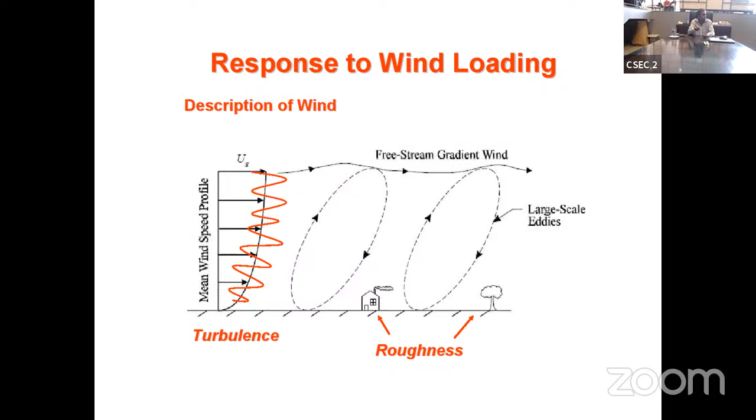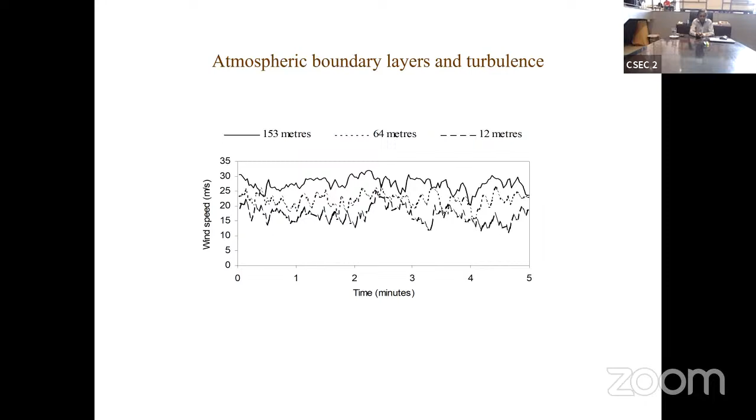Just an example. So the roughness effects become less when it goes to the top of the buildings, at different heights above ground. I'll come back to all that. So again, I'll just skip some of the basics. But these are the features. You will realize already the increase of speed with height, that the average parabolic profile changes and increases with height. And the turbulence, I will explain a bit later on, changes at each height level.

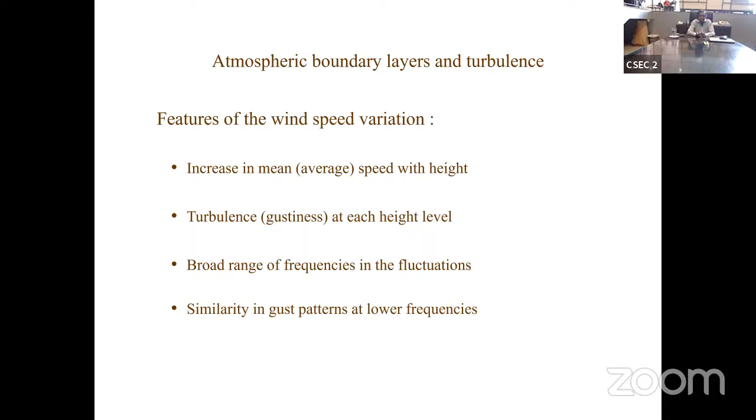Also, it's probably not that important for high-rise design, but the frequencies of the fluctuations of the wind speed change as well. And also the gust patterns. I'll come back to gusts later on.

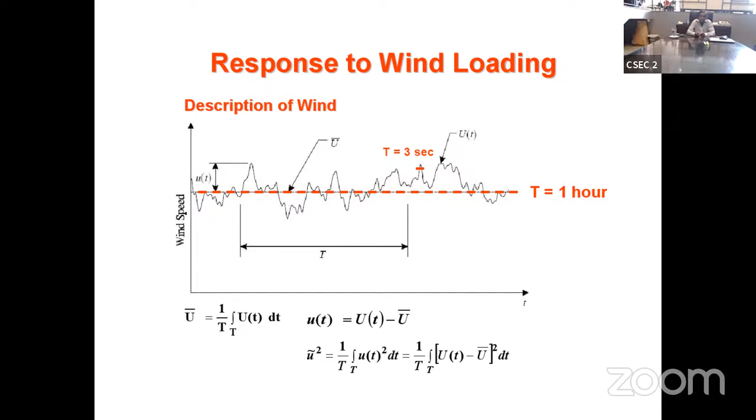I always proudly say the Australian Wind Code, not because I'm on the committee, is considered the best in the world. That's not because of the present committee, but the pioneering work done by Professor Bill Melbourne, Dr. John Holmes, and people like that. The Australian Wind Code has some of this work which is not in other codes. That's why it's used not only in Australia but other parts of the world as well. You can also look at the Eurocodes and ASCE 7, the American code. But the Australian code has been very popular.

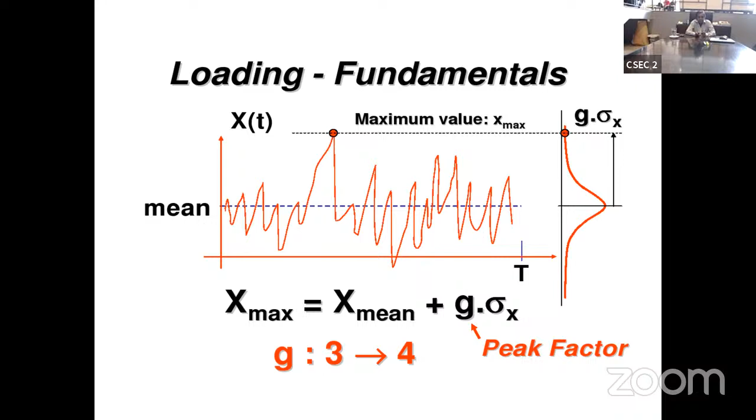We need maximum values for our designs, structural design especially. So we need that, and that's why we get the mean plus the peak factor and a standard deviation. So then actually I'm just in the Australian context, but it can be applied to different places. If you think of Colombo, wind speeds are really closely related to Melbourne wind speeds.

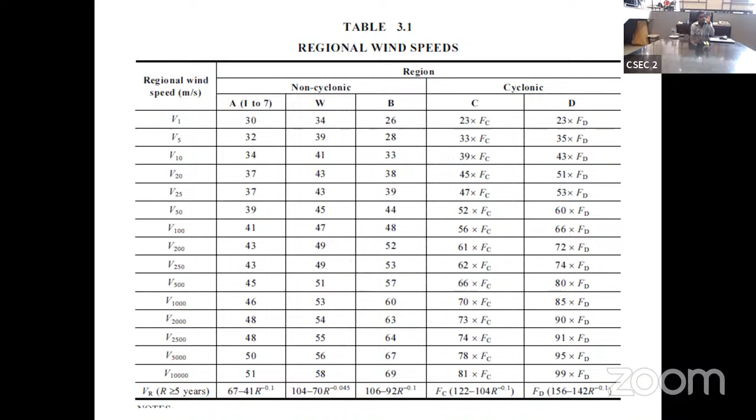Anyway, these are scientific definitions, which I will not explain too much today. So there's a scientific statistical definition as well for return periods. So these are return periods, but that crude definition I said is good enough. So we sometimes say 1 year return period, 5-year return period, 100-year return period. It'll happen now and then it'll happen only within 100 years. So that's a 100-year return period. That sort of crude definition is good enough for now.

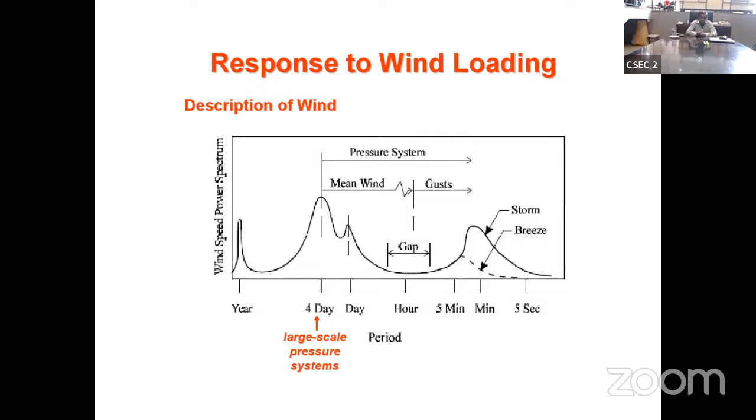So this is the response to wind loading, but don't worry about all the detail. We use in wind engineering what's called the wind speed spectrum, with time on the x-axis. You can see with the normal storms and all that, it's really more towards that 3-second gust speed side. That's all I want to say. And you will see the mean wind speed plus the gusts, the turbulent gusts, are there. So you add them up. But these are spectrums which you don't need to worry too much about.

If you like, you can read John Holmes' book, Wind Loading of Structures. You can even Google Wind Loading of Structures, John Holmes. He is a very close friend of mine, leading our wind code committee. His book is the most popular book, Wind Loading of Structures by John Holmes. And some of that I learned from him as well. My mentors in wind engineering are John Holmes and Professor Bill Melbourne. So I was very fortunate to learn wind engineering under both of them.

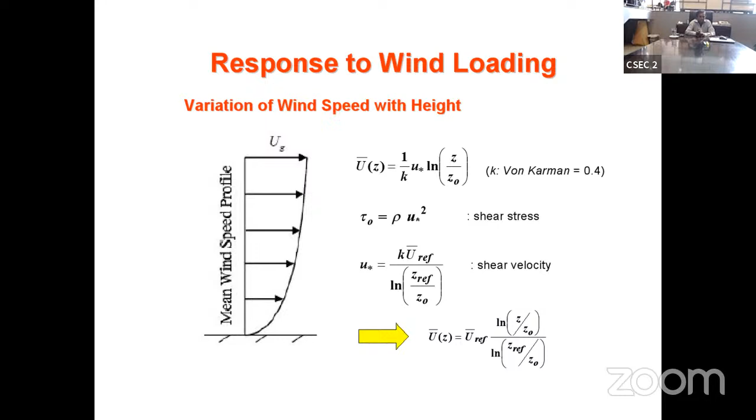So with the wind speed with height, there are standard equations we use to define the wind profile. It's close to a parabolic profile. It's zero at the ground, as I said, and then increases in a parabolic profile until the gradient height. After that, it roughly remains constant. I'll give some values. So this is another, the power law profile, which is the one we normally put in our codes. It's the next level of the parabolic profile.

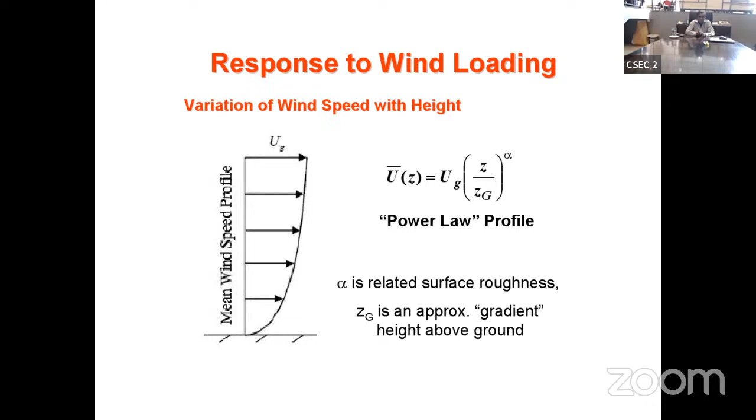So then what happens? Then we define what are called terrain categories, depending on the roughness. On the left-hand side, you can see the sea or coastal lines, airports, all that, with hardly any roughness. So very low roughness, so the gradient height is lower because the surface roughness is very low. The wind speed settles down very quickly, so the gradient height is lower.

The other side is terrain category 4, which is the city centers. In this case, in the city centers, the roughness is very large and the gradient height is very high, because it takes large heights to really reach the gradient height of 500.

So it depends on where the building is. Usually high rises are in the city center, so it's a bit more towards the right-hand side. At the same time, a lot of engineers make this mistake. That is, for high rise, sometimes we take terrain category 4, which is city center. But we have to take between about 2 to 3.

In this webinar I will not ask live questions, but recently I asked in an engineers forum and no one could answer this. But it's a very simple explanation. If I'm designing a tall building, I would look at it depending on the height, between 2 to 3. It can be even 2. The reason is that particular building could be the tallest building around that area.

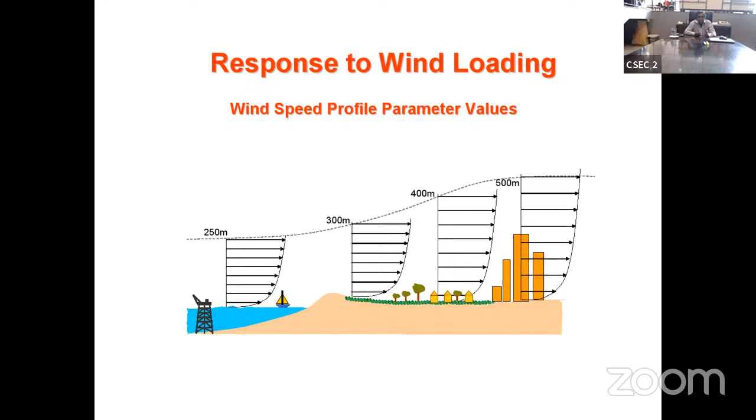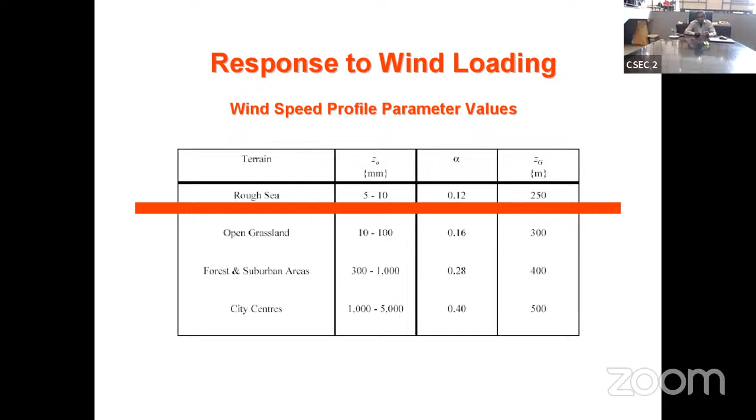Now, once we select the terrain category, the first one is a rough sea, as I said, or the open air. Again, you can see the gradient height. Sorry, the last column is the gradient height. The ZG changes, and again, as I said, 500 for the city centers. It depends on the code. Some codes have different values, but roughly you should know why the gradient height changes, because it's the roughness in there.

I'll skip this one. So there's a turbulence intensity graph in our Australian code. Height is there, and you can see the turbulence intensity, because as I said, the surface roughness changes, and the turbulence values become lower. But in the Australian code, one of the changes, I was part of that team, we made this change.

We introduced another terrain category in between called 2.5. Because people used to interpolate between 2 and 3, we said, why not? We put 2.5, and we have an extra column as well. For many cases, we can use even 2.5. This is a chart given in the code, turbulence intensity. The height versus the turbulence intensity depends on the terrain category I mentioned before. City centers are on the 4 side, and the open areas, like airports, rough seas, oceans, are terrain category 1. Others are in between.

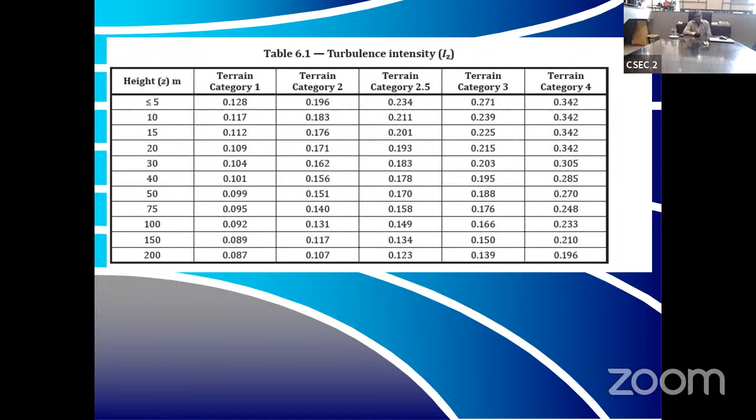Now, coming back to the static versus dynamic. Static is on the left-hand side. The static is where you are used to this equation: force is equal to stiffness times the displacement. That's a basic equation we all learn for statics. You can draw your parabolic wind profile, find the wind forces, and then apply them. So force is equal to stiffness times the displacement.

However, this is important: the wind, especially on high-rise structures, is dynamic. You can't just say static. Dynamic means you have to introduce two new terms, the mass times acceleration, and also damping, because dynamic means the wind speed changes. The mass times acceleration is called the inertial term. The damping times velocity, the next term, is called the damping term. And the third term is the same as statics, stiffness times the displacement. Computer programs calculate all this. However, we need to know the basics.

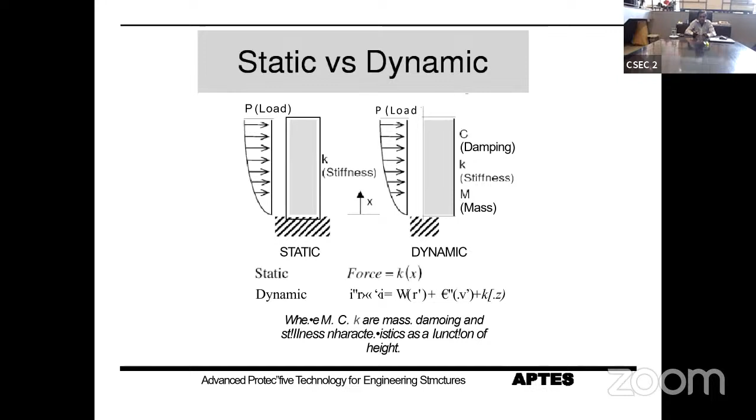Eureka Tower, again, one of the projects that I got involved in, was Australia's tallest; now it's overtaken by another building next door by a few meters, but it's a unique building. At the next slide, I'll show why it's unique. I really helped them with the wind design and also the high strength concrete elements; all that work of mine went into this building.

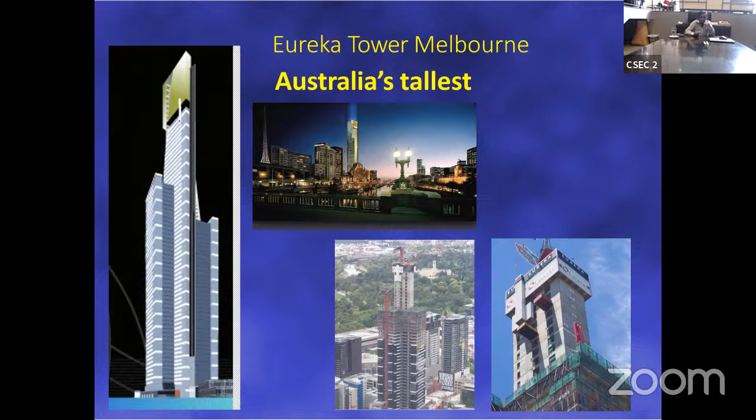So again, what we do in structural systems today, as I said, that's the overview of the lecture or webinar. Structures with outriggers. Outriggers are one of the best inventions we had. Why we can have all these very tall buildings is due to two things. One is high strength concrete, and some of my rules for high strength concrete went into the Burj Khalifa type of project.

So high strength concrete really, because of the strength, we are now going up to about 150 megapascal for high-rise buildings. A few years back, I was asked to look at a pre-feasibility study for a 2-kilometer building and comment on the material. So I was suggesting 200 MPa for that. We know how to make that concrete. So that's the high strength concrete.

The other one is outriggers. This is how the outriggers work. You have a core element. About 95% of the wind is resisted by this core element. This is the lift well, where the lifts are. So we have a very stiff lift well or core, normally concrete. And this core element usually has high strength concrete at the bottom, and it can be lower at the top.

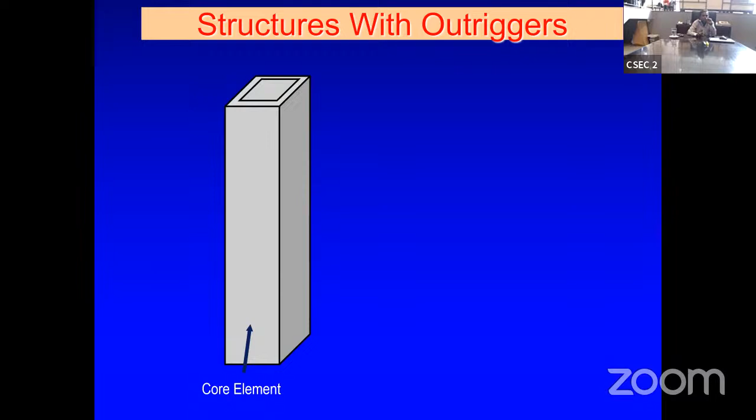So a tall building can be considered to be a cantilever, right? With the loads coming down, you will know the maximum moment is at the bottom, zero at the top. Shear forces are also maximum at the bottom and zero at the top. So the base bending moment is the highest and the base shear is the highest. Those two are the very key factors we need.

Moving on, what we have done now is to take a column outside and join that with what's called an outrigger. I have separate lectures for this, but today just to show something: rather than one person working, if two people work together, it works better, because you share, so the core moment is taken out a bit. Very simply, push and pull puts some compression on the outrigger column, and from that you have additional moment resistance from that column taking compression and relieving tension in the core element. I'll leave that to another day.

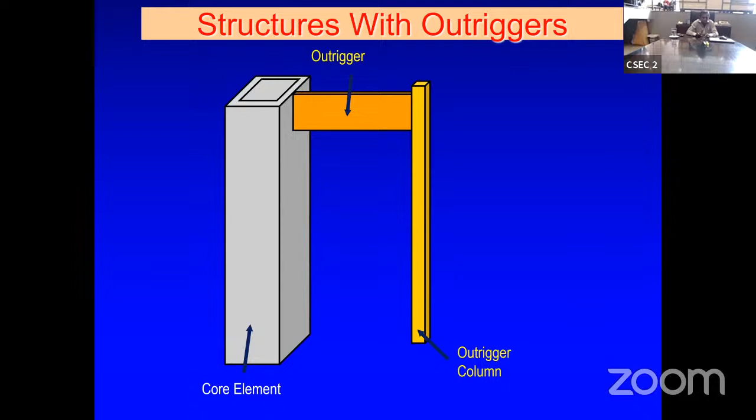You can read how it works in some of my lectures on the web, but I will not explain today. The outrigger is joining that; I'll show one example later. That's really key for us to design some of the tallest buildings. Every tallest building in the world has these outriggers, except for some special plans, which I'll mention later on. Then we put what's called a belt truss for all the columns to work together to help the outrigger column. These are very common. That's why we can design very tall buildings.

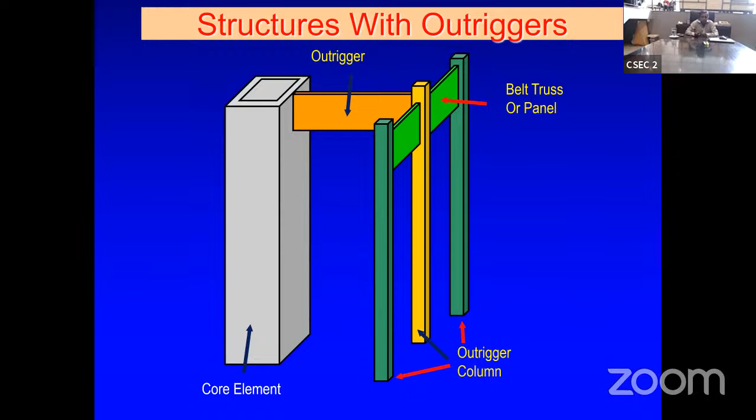And what outriggers do is act like a hat. You can see it releases a bit of the core moment, takes out a bit of core moment, so the core sizes can be reduced.

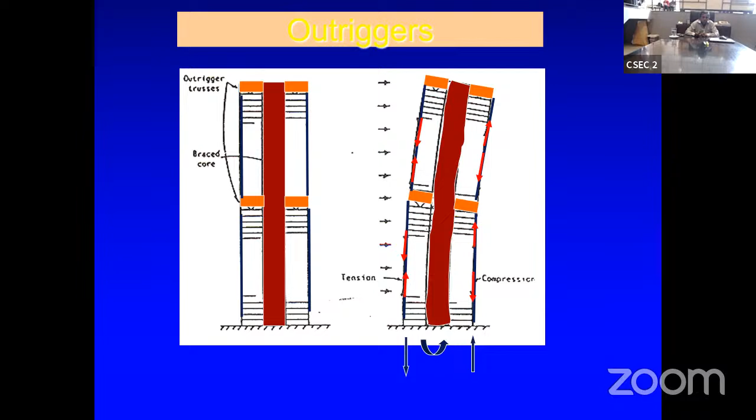This is something that I'm again proud to be part of, the initial stages of Eureka Tower. The developer of this building, it's a success story, probably the only one, and a lot of people appreciate this. The developer was the architect. The engineers were the company that I used to work for at the time, Connell Wagner. I was at uni, but I was still working with them on this project.

So what we did was we said one side is a bit weak, the north-south direction. We couldn't satisfy the requirements, so we had to put outriggers. Now this is why it's unique. Outriggers normally are at about 2 or 3 levels. For this one, we put outriggers at each level because they are the separation of the apartments. Because the architect was the developer, we could put outriggers at each level. That really improved the efficiency of the building.

Because if you put a full height outrigger, normally you need about a full storey height, and you can't put it anywhere else. You need to put it in plant rooms or machine rooms. But in this case, it was smartly put between the apartments, so we could put outriggers at each level. Anyway, I'll leave it like that. If there are any questions, I'm happy to answer.

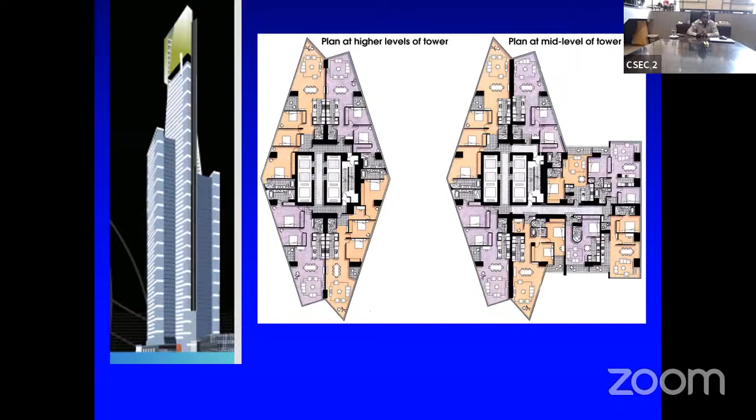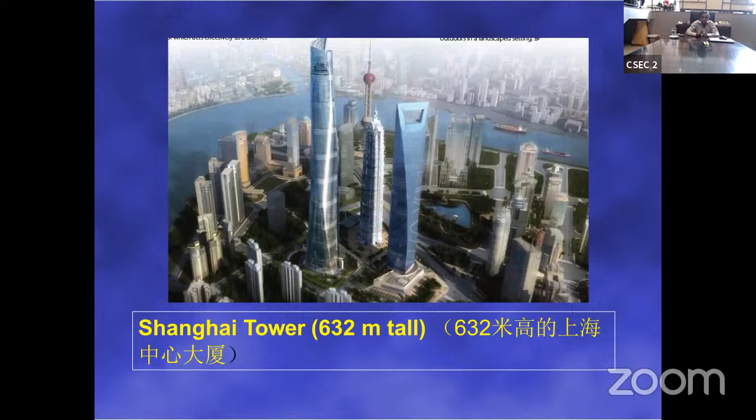Shanghai Tower used to be the second tallest, but when the Merdeka is open, this will be the third tallest, 632 meters tall. I'll have some slides on the Merdeka building, which is 679 meters. In this one, I had some involvement through the Victorian government because there was an agreement with them to help in the high-strength concrete side. I got involved in the concrete side, not on the wind side, through the university work. I know them well also.

So what they did was a really very difficult task. They changed the wind pattern, reduced the wind loads. Wind loads are the key. Reducing the wind loads means they rotated it at every storey, to minimize the load from the wind, rotating at every level by a small degree. Doing this, we can reduce the turbulence. I'll come to vortex shedding later on, but I'll go through a bit quicker. Vortex shedding, that's turbulence. Reducing turbulence is a key.

So we call it confusing the wind. We don't allow the wind to really settle down. In this case, by rotating every floor, we really upset the wind. If you upset the wind, in fact, it reduces the wind effects. Normally, it's the other way around. If you try to upset people, they become more active and more turbulent, right? It's a little bit the other way around here.

I have these stories I'll tell you another day, but not today. Some of these turbulent stories.

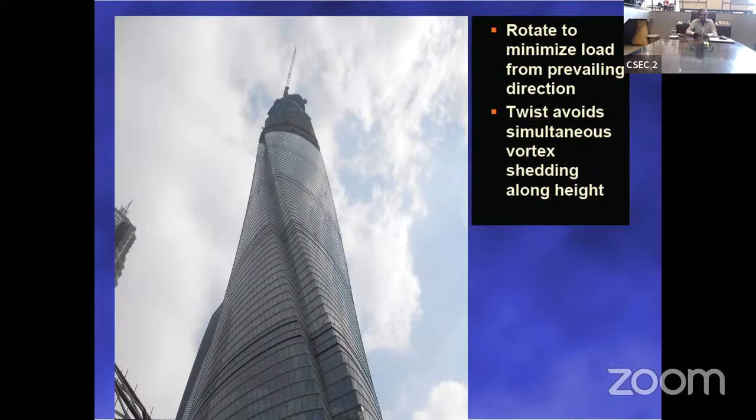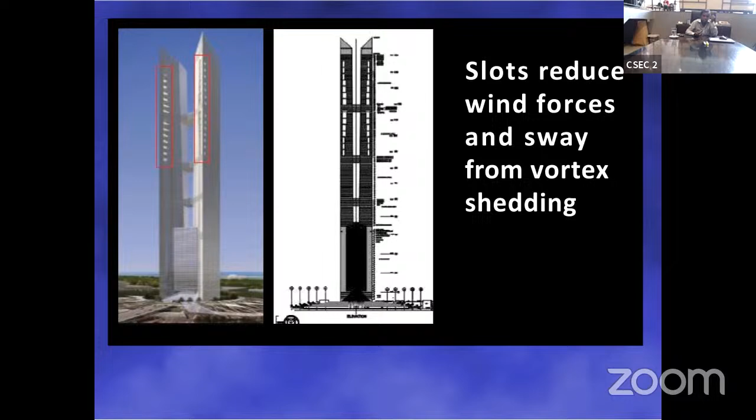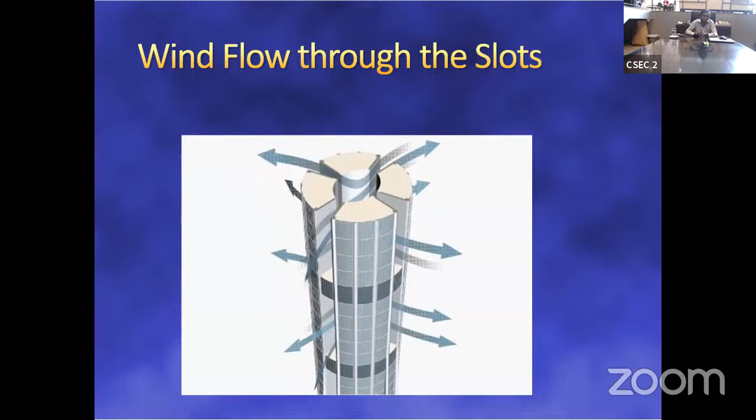The 1 kilometer tower, I was again proud to be involved in the initial stages. We did lots of work at Melbourne University trying to shape it up, having slots to reduce the wind flow through the slots. That work we suggested by doing computational fluid dynamics work.

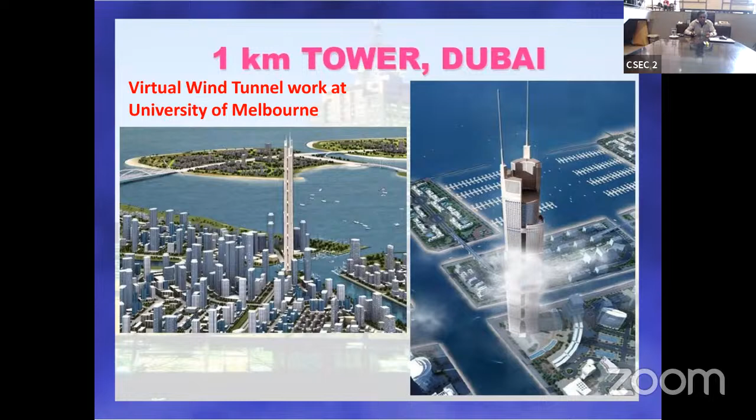These foundations, they put $150 million in Dubai, but then the world financial crisis came, 2008 if I remember correctly, and everything stopped. It's worse than the Sri Lankan financial crisis, which was confined to Sri Lanka. But this was at world level. So Dubai was affected a lot. They stopped the construction of this. The $150 million is under the sand still. You never know, one day it will come. So that's okay. We could achieve something as a team.

Taipei Financial Center: I told you, by putting a very high mass on top, you can reduce the dynamics. That's what is done. You can go there and see this big mass at the observation deck. So maybe you can go on your next holiday to see the Taipei Financial Center and see the very large mass on top, which reduces the dynamics.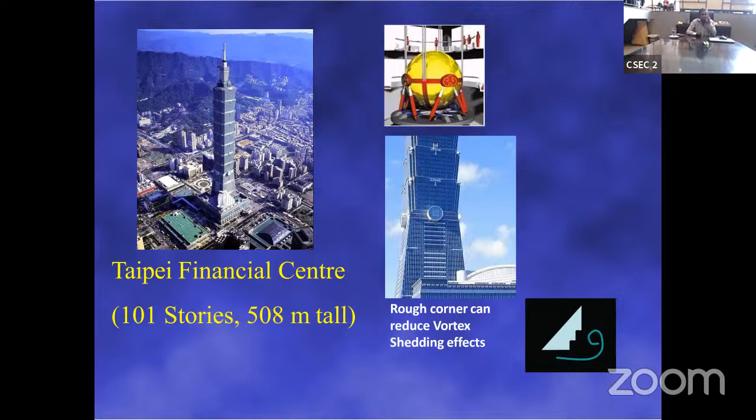Also, they had rough corners. As I said, confusing the wind, having rough corners, you also really reduce the turbulence. It's all about reducing the turbulence in wind, simply put. So this was about 3 weeks back, those who have seen this photo. Merdeka is going to be the tallest. I was very proud to be involved in certain work. I was there in the workshops from the beginning because the architect was from Melbourne as well.

Second tallest, 118. It will be open only next year. If you go there, you can only see it from outside. I had a chance to go to the top. So this is the building; really no need to read from there. It's a building with different heights, and different consultants got involved.

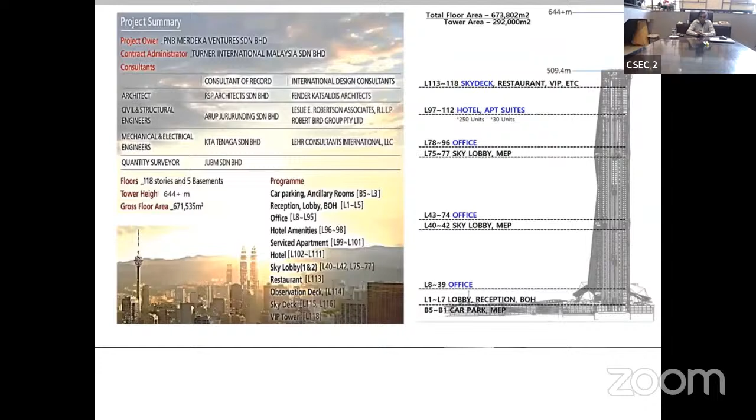One of the things I really gained was sitting next to Les Robertson, who I consider one of the best in the world, who designed the World Trade Center. He was there at the beginning and told me stories about the World Trade Center and everything, but I will not have time to say today. He passed away about 3-4 years back, lived till about his 90s. His wife's team will be presenting this work in the next AWH conference. She's also a structural engineer, well known to us.

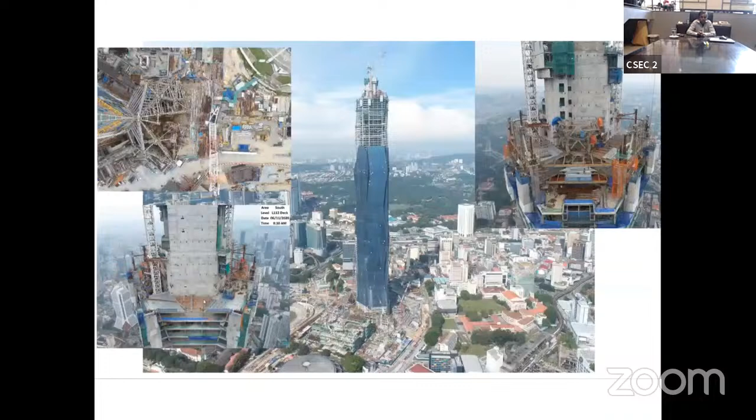So this is during construction, the Merdeka Tower. This is quite important. Those who are listening on the web, seriously, if you're copying any of these slides, you need to get permission to present. I was part of the team, so I'm allowed to present. But anyone presenting these slides has to get permission from the PNB developing team, because there could be some sensitive information. Happy to present today; this is also from the ICE Malaysia Institute of Civil Engineers presentation.

They presented this material. Now this is where you will see the structure. This is the concept stage. All these systems were considered. In the initial workshops I was also present when we talked about different concepts. We had Peter Irwin from RWDI Consultants, the leading wind engineering consultant. They have a big wind tunnel in Canada. They did Burj Khalifa, Shanghai Tower, and Merdeka 118 as well, so they are the leaders. Peter Irwin is well known to me as well, so he was presenting some of those.

But the structural group, especially Les Robertson and Robert Bird Group from Australia, were doing the initial structures. Arup Malaysia was the local consultant, which later joined. The final one is this first one. You can see different concepts and different shapes of the building were considered. That's why it's called structural wind engineering, the word I've given: we need to know both wind engineering and structural engineering to design these. I have to appreciate CSEC and Mr. Shoma's work as well on the structural wind engineering side.

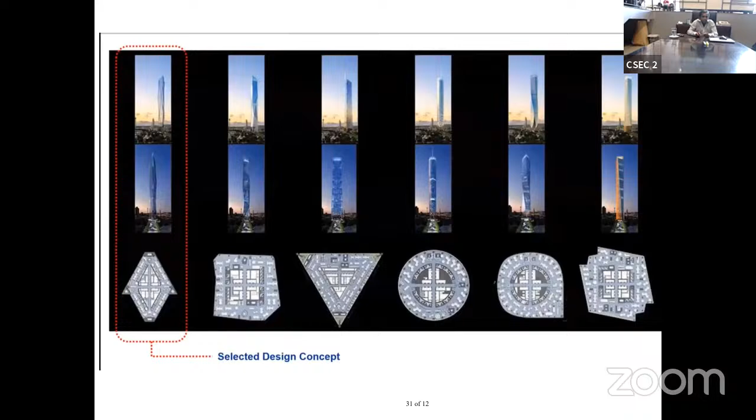So this is the final concept and shape. This is called aerodynamic shaping. That's key in tall building design, and you can earn a lot of money if you really master it. We get paid very little, but some of these wind engineering consultants get paid a lot. Aerodynamic shaping means you're reducing the wind effects. I'll introduce that later on.

In tall buildings, the difference from normal buildings is the drag force, and the other one is crosswind. The perpendicular movement is crosswind. So you have movement parallel to the wind as well as perpendicular to the wind. This crosswind action could be higher than even the along-wind action. Today I don't have time to teach all that, but look at the along-wind and crosswind actions. In normal buildings you don't worry about crosswind, but in tall buildings crosswind is key, so you need to reduce it.

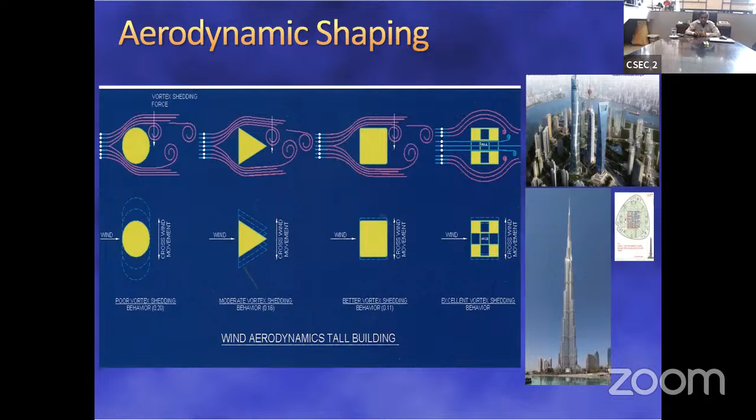Next time, when I do a longer course, maybe in December, I will talk a bit more about drag forces, crosswind, and how to reduce them. I had students looking at that. So Merdeka 118, again, please don't copy this, anyone in the webinar. This is the office floor plan here.

In this case, these are mega columns. There are many mega columns being put in there, and the outrigger system. Mega columns and the outrigger systems are joining. That's the structure system. It was very weak in the east-west direction. I know that in some of the workshops this was discussed in detail.

The east-west direction was weak. So Les Robertson himself came up with the outriggers joining the mega columns. As I showed you before, the core, the middle structure, joining the columns outside through outriggers to make mega columns outside really gave the stability to this Merdeka tower.

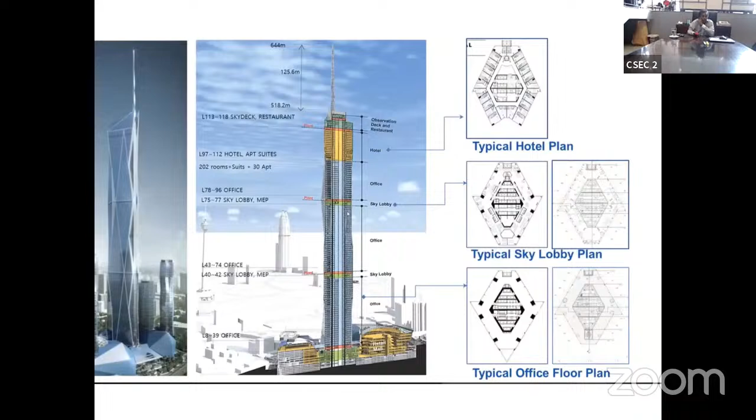Don't worry too much about that. These are the outriggers, both directions. The east-west direction was the most critical. East-west is here. In the east-west direction, you can see more mega columns being connected through the outrigger systems. And the north-south direction was all right.

After the analysis was done, east-west had 3 outrigger levels, if I remember correctly, here at the middle level, bottom, and the top. But in the north-south direction, the initial designs had 3 outriggers, but with Mr. Les Robertson's involvement, one of the outriggers at the middle level was taken out. Huge cost saving by doing that. This is the kind of optimization you can use. So optimization is key.

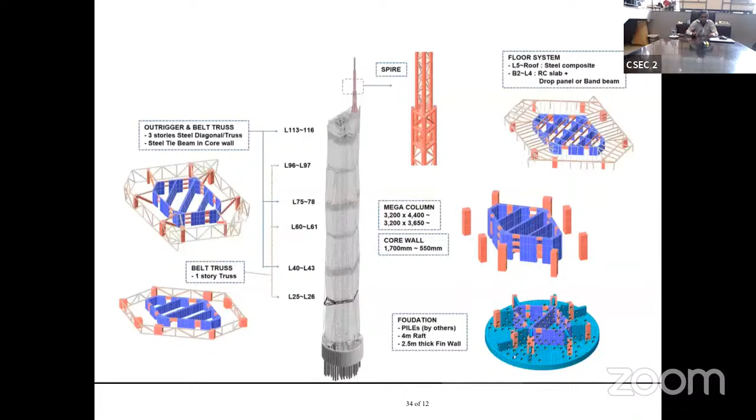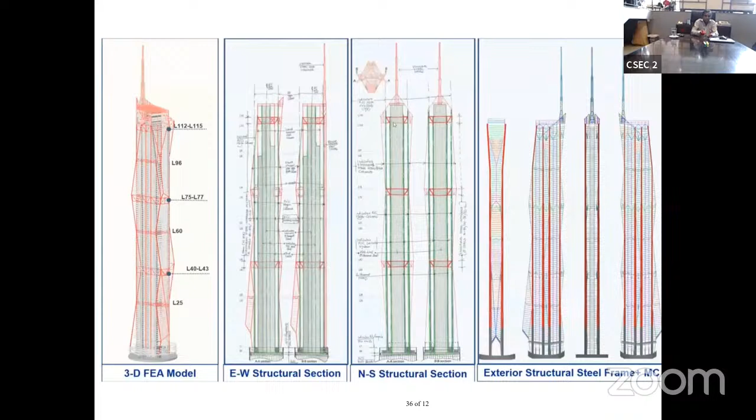Now this is the first time I'm presenting some of the Merdeka information. So that's where the building is, skip that detail. See the east-west structural section, you can see the outrigger locations. The north-south middle outriggers were taken off in the final.

Getting to the Jeddah Tower. Jeddah Tower is going to be the world's tallest, 1 kilometer tall, and CSEC was invited by one of the Chinese builders to join their tender. Not sure when it's going to start again. It stopped and started; 2012, I think, it started. There were other issues, political issues, financial issues, and COVID came, so this got stuck. I heard it's going to restart, but it hasn't.

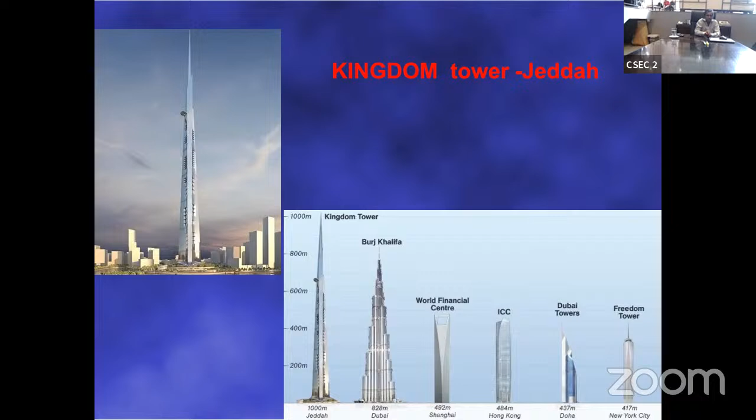It's going to be 1 kilometer tall, higher than the Burj Khalifa. See where the Burj Khalifa is. The Burj Khalifa is 828 meters tall, if I remember. This is going to be about 1 kilometer. The structure system is not an outrigger system, it's mega walls. I'll show a plan later. A mega wall system, similar to the Burj Khalifa. SOM designed the Burj Khalifa, and they suggested this similar system. In this case, 3 mega walls are shown there.

See, it confuses the wind. If you have a symmetrical building, you get a lot of turbulence effects, and wind loads can be very high. These are the things I really want to mention in this webinar today. You need to do these things in tall buildings. For a 2-story building, no point spending a lot of time, but wind is still important. When it gets to high rise, wind governs everything. So we really need to do these things.

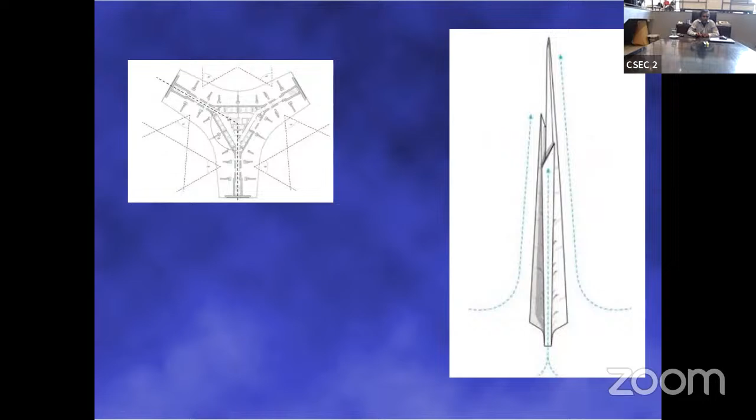In this case, it confuses the wind, as I said. See, it's unsymmetrical, different directions, so the wind loads were reduced. That's optimization we normally do, also called aerodynamic shaping. These are mega walls. In this initial construction, see the mega walls starting to be constructed. This was 2013, if I remember correctly.

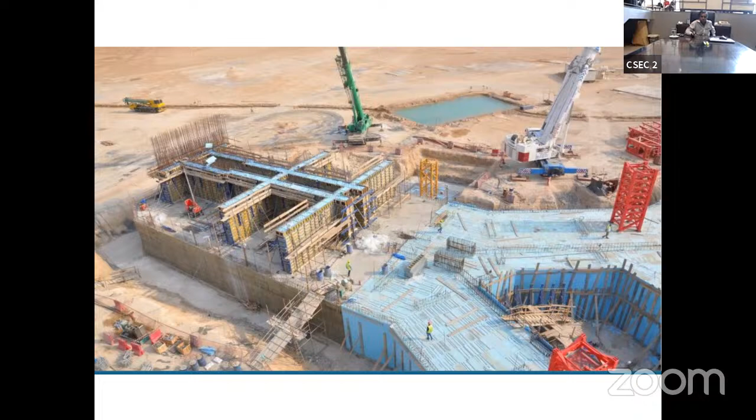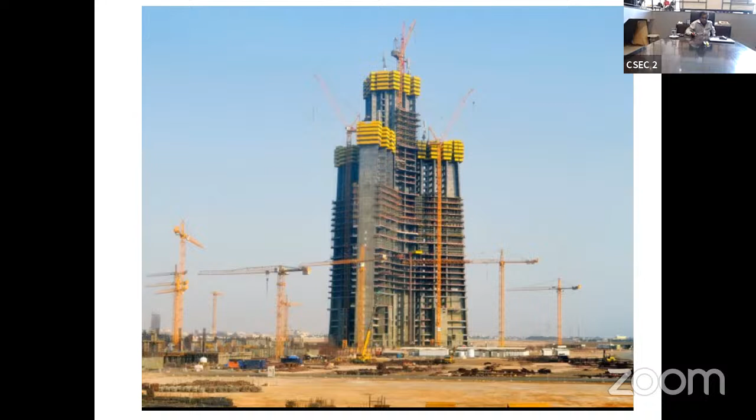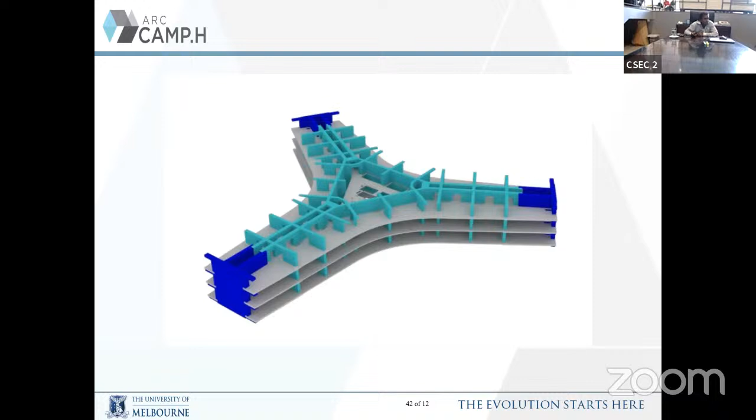It's gone up to about this level, I think it's level 43. It's very slow. As I said, mega walls, a triangular area at the middle, and then mega walls. So sort of outriggers, but joining the mega columns there. So that's the system in Burj Khalifa and Jeddah Tower.

Types of wind design, the 3 types of wind design. I'll run through quickly. So the types of wind design: the environmental wind studies, and the wind loads for the structure. That's very important, calculating the wind loads on the structure. I'll start from the top.

Environmental. Having a tall building means you are changing the environment, everything. It's like building a city. That's why environmental wind studies are done, looking at the environment. Sometimes we do air pollution studies there too. These are all done through wind tunnels. I'll come back to that.

Second one, cladding is the external face. So the cladding, the external face, is the wind loads for the facade. The outside cladding is like the external face.

People identify us through looking from outside. Similarly, for buildings the outside cladding is quite important. The cladding is the first to feel the wind load, so we need to look at the wind cladding loads as well. Codes are there, but they give crude values; that's why we need wind tunnel studies, which I'll come to.

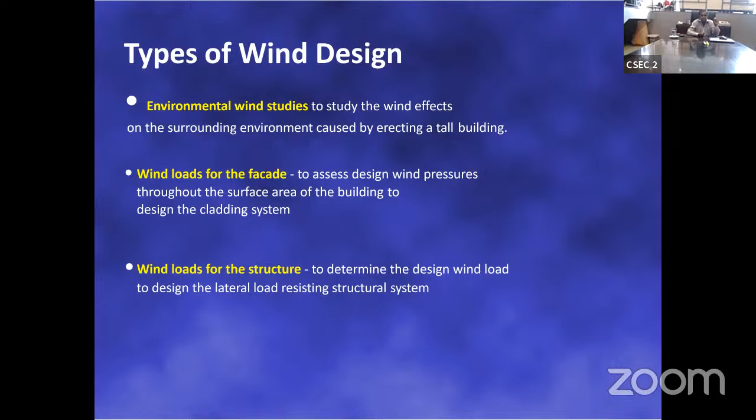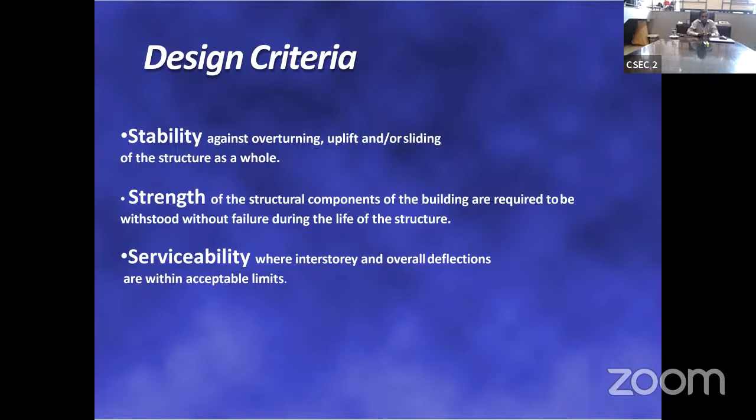So these are the three types of wind tunnel studies we do. Design criteria are the same as normal. Look at the stability, which I call the 3 S's: stability, strength, and serviceability. I will not go into the design side too much today; I will not have time. It's more of the wind loading side. There's an SDI document, a very good document on tall buildings, with a bit more detail, and some of my papers have some more detail on this.

But the drift is very important. The total deflection is also important. To find the total deflection, you see height divided by the displacement. There are no fixed rules in the world. There are no proper codes. I think one of the first is that SDI document on tall buildings, which anyone around the world can ask SDI for. That book has some guidelines, but these are not fixed guidelines. So it can be 500 to 1,000, the height divided by the top deflection.

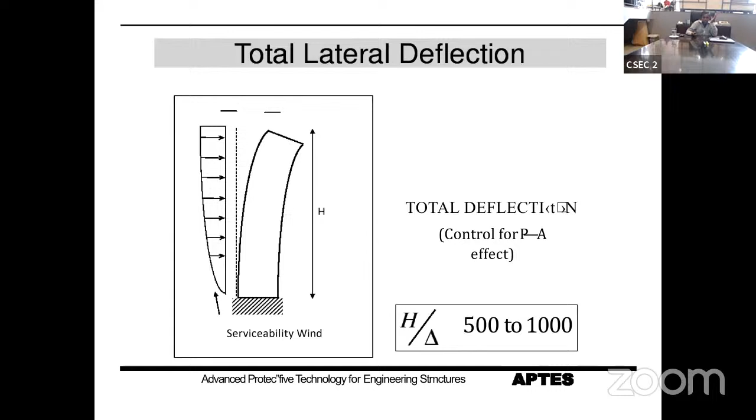But more important is what's called the wind drift. Drift means the displacement difference between two stories, the story height divided by the displacement between the stories. That's, say, 200 to 400. We say generally 5 to 15, depending on the project and the design. So let's say 10 millimeters or so. That's the reason wind drift is another very important governing criterion for tall buildings. The other one, which I'll introduce later on, is the perception of motion.

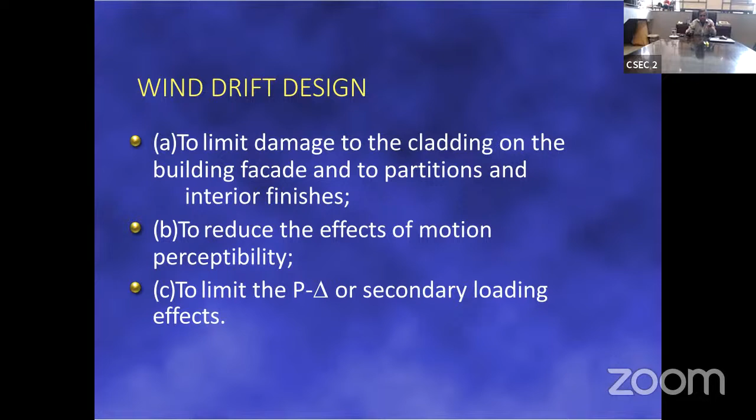Sorry to go back, but the reason wind drift design is very important is the cladding. When you fix the cladding, it feels the difference in deflection between the stories, not the total deflection of the tower. So the wind drift is very important. Also the acceleration, which I'll come to. Focus on number A; don't worry about B and C now. Especially for the cladding and the interior partitions, wind drift has to be limited, so you need to come up with that number. That's the interstory deflection.

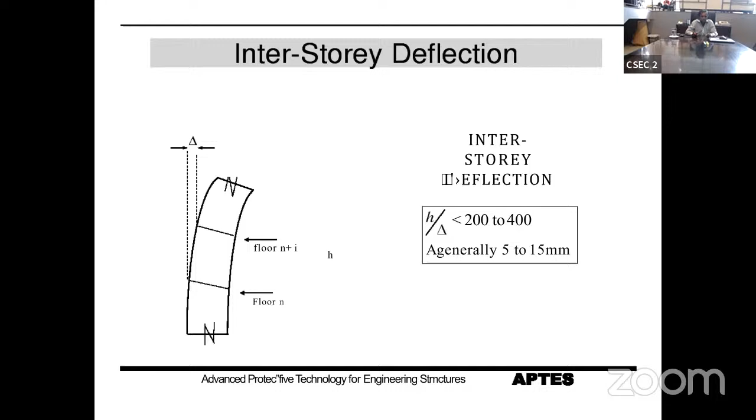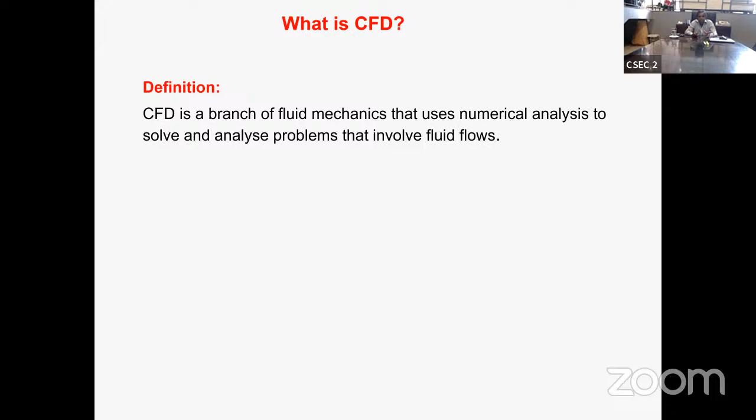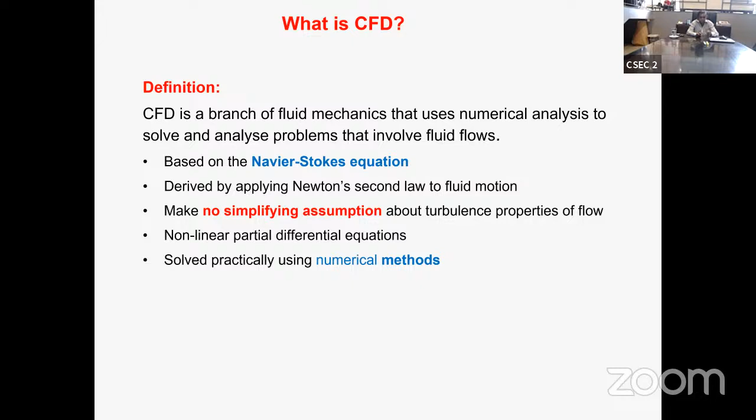I'm running through these very quickly. Computational fluid dynamics, CFD, has changed the world for high-rise designs. The CFD is based on theory; unless you want to go deeper, don't worry about that. But it's the famous Navier-Stokes equations, based on Newton's laws. Don't worry about the numerical methods. CFD means solving the Navier-Stokes equations using numerical methods.

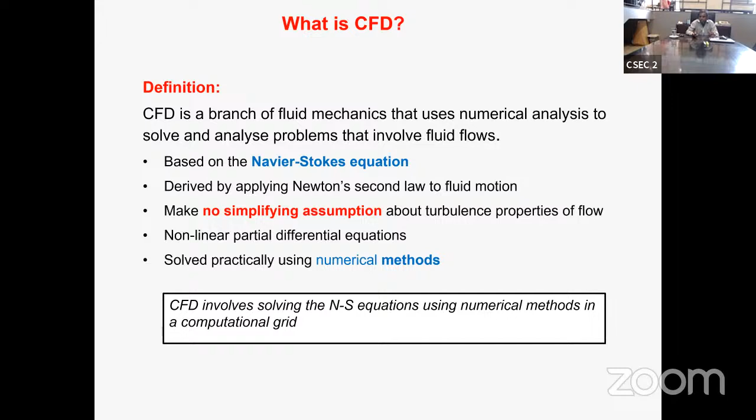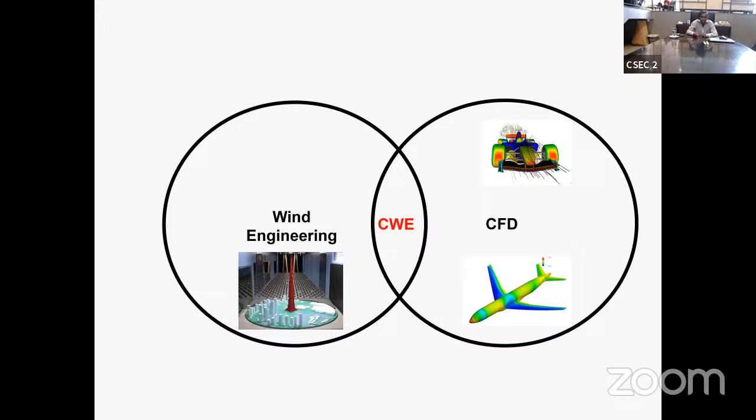Computational fluid dynamics has changed the world in terms of high-rise wind design, and it's still evolving. Wind engineering is on the left-hand side, and computational fluid dynamics applies to any fluid. We have been designing aircraft with computational fluid dynamics for a long time. Computational wind engineering is a combination of wind engineering and computational fluid dynamics. That's basically what we are using for high-rise.

Then we need to look at what's called fluid structure interaction. We have a computational fluid dynamics model, we put the loads, and then we look at the deformation. Wind is a fluid; the wind and liquids, the water and all that, are fluids. The fluid applies a load, the structure deforms, and because the structure deforms, the loading gets adjusted. This is called fluid structure interaction, FSI. Very important to model. We don't need to model it for every building, but FSI is quite important.

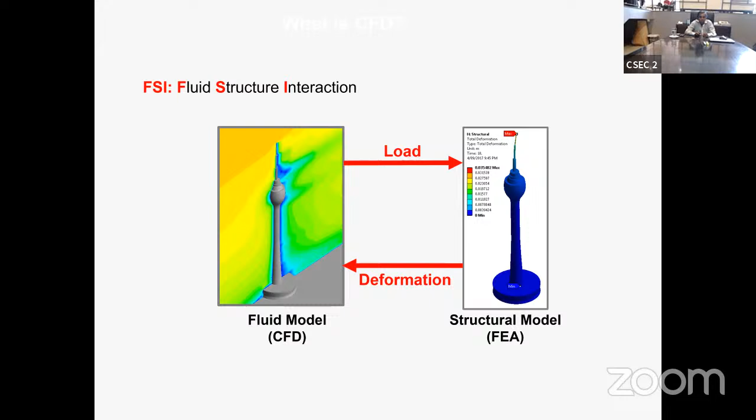Today is not a lecture on CFD, but I'm happy to talk about that another time. For the Lotus Tower, we did some analysis; thanks to Dr. David Mohti for doing this work with me. We did some very new work, looking at the FSI model using Fluent. For the first time in the world, we modeled the accelerations and compared them with the wind tunnel test, and they were very close. I haven't seen acceleration calculated this way for any other building in the world.